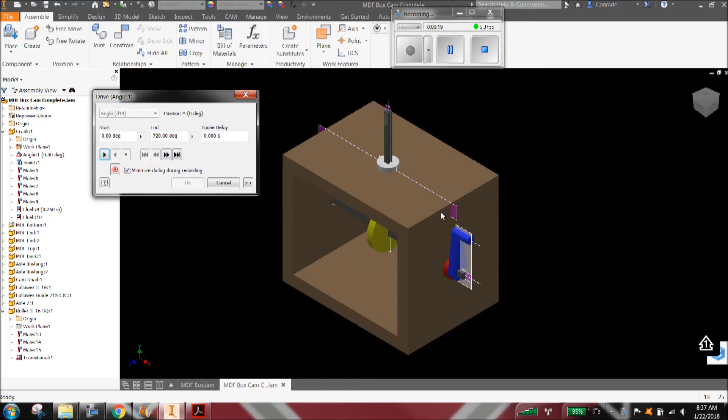Okay, what we're going for here is the Automata assembly, and we'll do just an assembly with one cam. Your actual Automata toy is going to have to be assembled differently, but this is what we're going for. And you'll notice that we've got lots of work planes helping with this assembly.

Just to review good practices and procedures: number one, make sure all of your Automata files are in one project folder. Don't use any subfolders, there's really no need to for this assembly. The first step you're going to do is assemble and ground the box. Those mid-planes really should be used.

Inventor likes math, but it likes geometry a lot better. And the transitional constraint that you use towards the end of this assembly wreaks a lot of havoc on just mating the axle to the cam itself.

So what we want to do is make sure you have a mid-plane and axis on your crank, your axle, your bushing, all your cams, the roller, follower, the guide, and the box top. I'll show you what that looks like here in a second. And then you can toggle off the visibility of those work planes and work axes as needed.

But the key is every part of the crankshaft needs to be constrained to the crank. Keep every constraint back to one part.

As we go through this, we'll see that if your cams are not built correctly geometrically, you will have issues, and this will not drive itself. Then you have the fun part of going back to fix it. But you must use axes and mid-planes to do this assembly, okay?

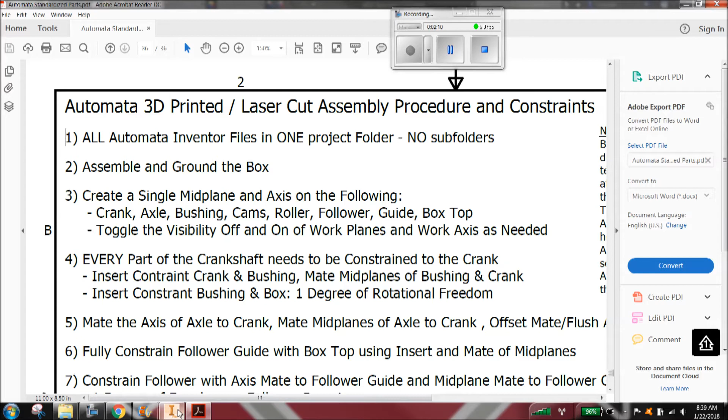So let's go back and look at what we're talking about here. You can see I've brought all my parts in for a simple assembly, and I have a mid-plane and an axis turned on for each one.

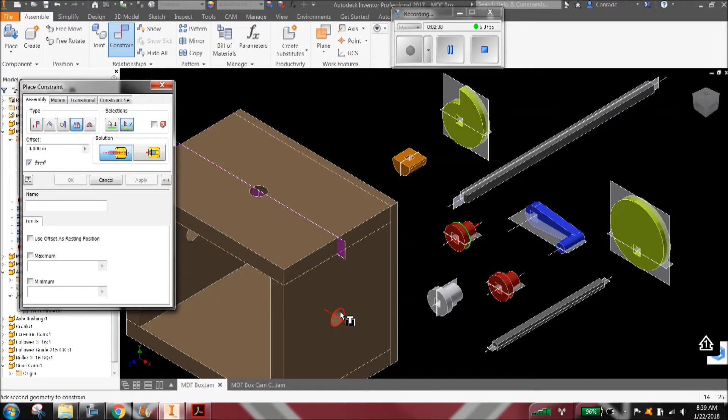Starting out this assembly, we'll just go ahead and pick the axle bushing and insert that. Remember to click apply so that everything sticks. And then I'm going to take the crank and insert that into the bushing.

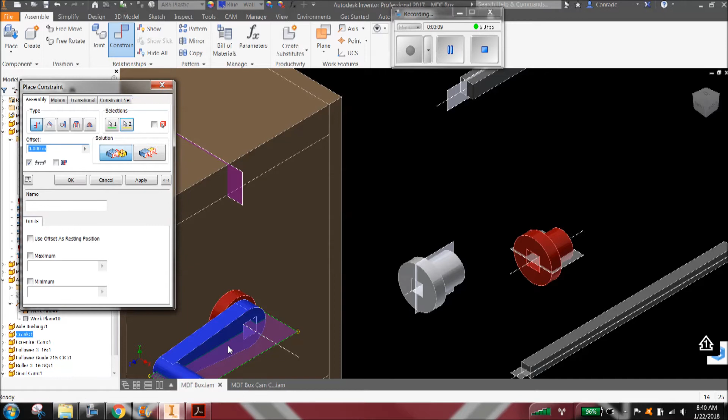Okay, so if I look at this right now, they line up with each other, but they don't spin together. So now what I'm going to do is mate the mid-plane with the mid-plane. Okay, so now when I rotate them, we can see that they are both spinning together.

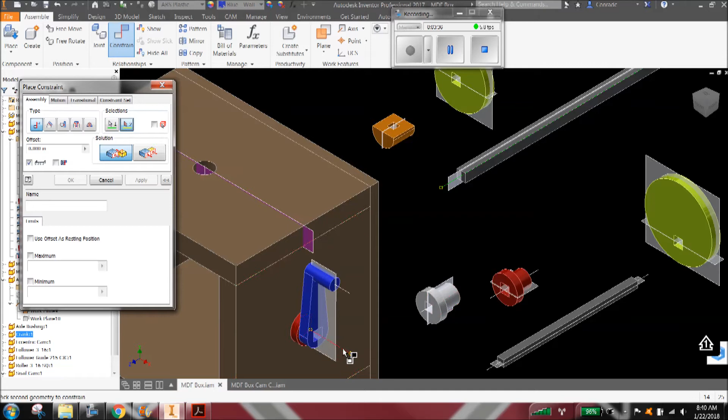Okay, next step is I'm going to put the axle in. So when I do the axle, I'm going to take the axis of the axle and mate that to the axis of the crank. Okay, so right now, what I've got there is that lines up.

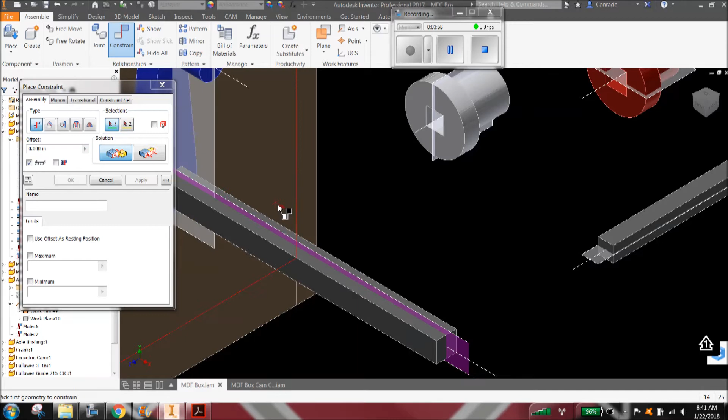Then we'll go ahead and again mate one mid-plane to the mid-plane of the crank. And finally, I could very simply just flush the crank outside of the crank face to the axle.

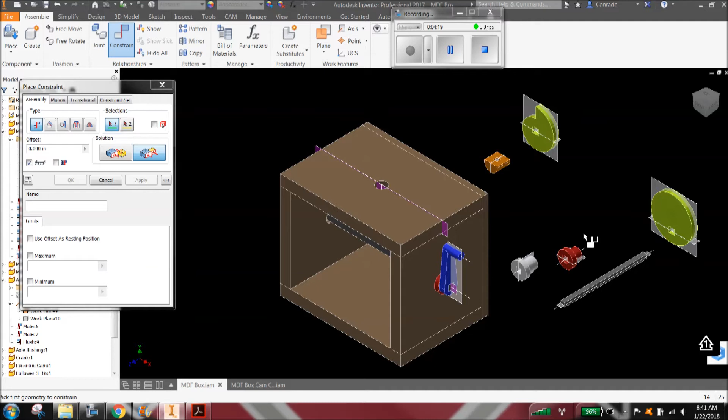Okay, next step, which would be very simple, I'll go ahead and put the bushing in on the other side in the same way. So an insert, and apply, and then go ahead and do a mate of work planes so that they line up and they spin together.

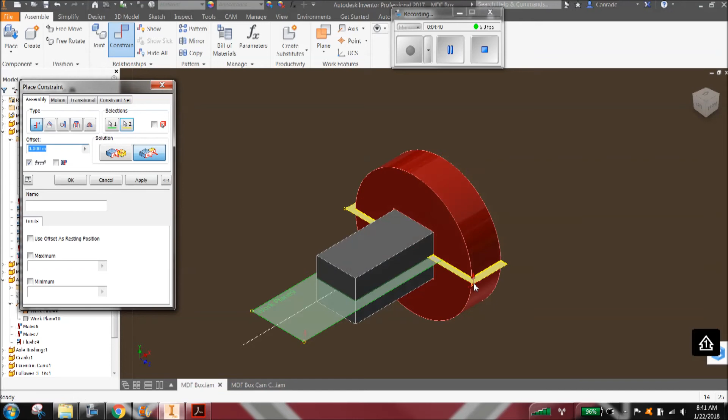Okay, so what we have right now is just rotational degree of freedom on the crank, and everything is moving together.

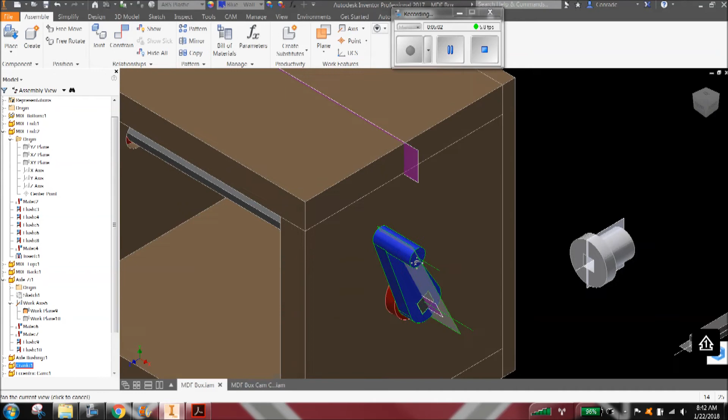Okay, next we'll go ahead and put one of the cams in. So for this, we'll go ahead and again mate the axis to the axis.

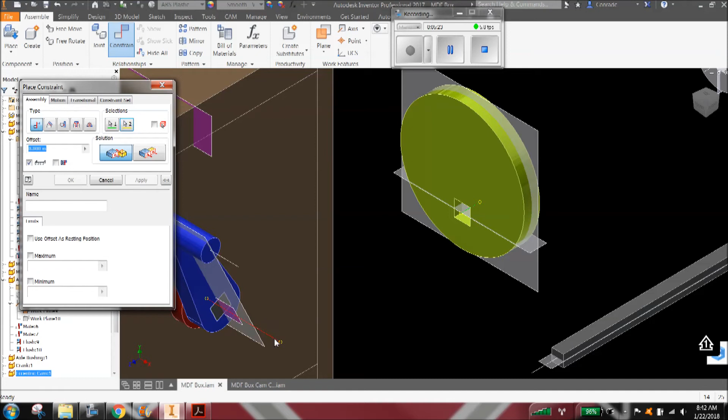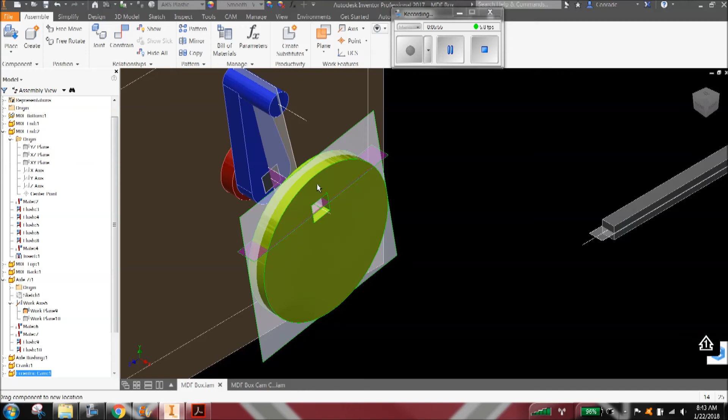Okay, so I know that looks like it's moving around like crazy, it's really not. And then what I want to do, since I have a horizontal and a vertical plane, the way I want these to line up, let's say I just rotated this cam around. Let's say I want these two to line up with each other in this fashion. Instead of mating the planes, if I had this vertical plane in I could do that, but I don't. So I'm going to do a 90-degree angle constraint of the midplane on the cam to the midplane on the crank.

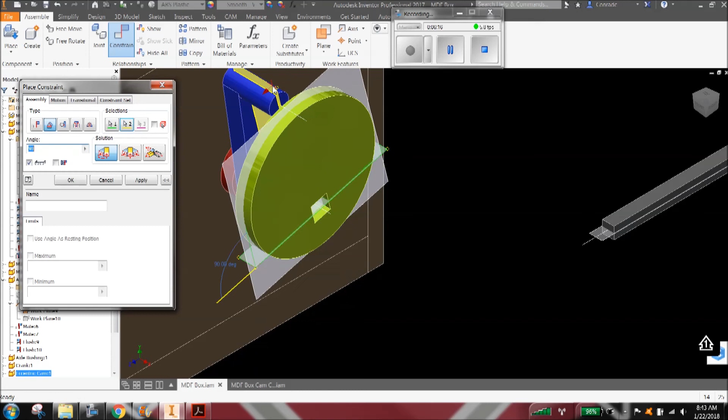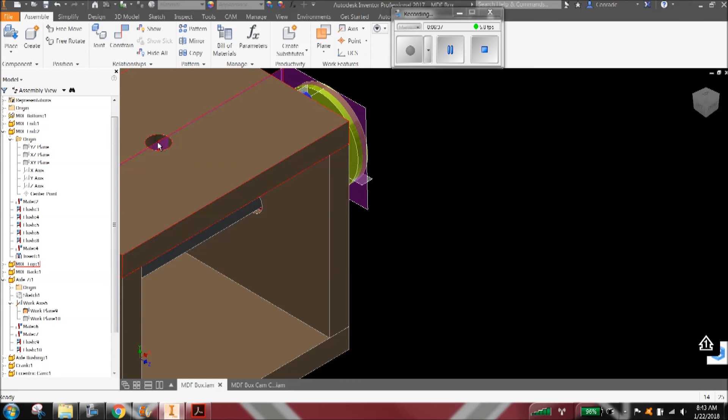So that gives me a 90-degree angle. Okay, and next I want this cam to line up right below the hole. So I will go ahead and mate that midplane to the axis.

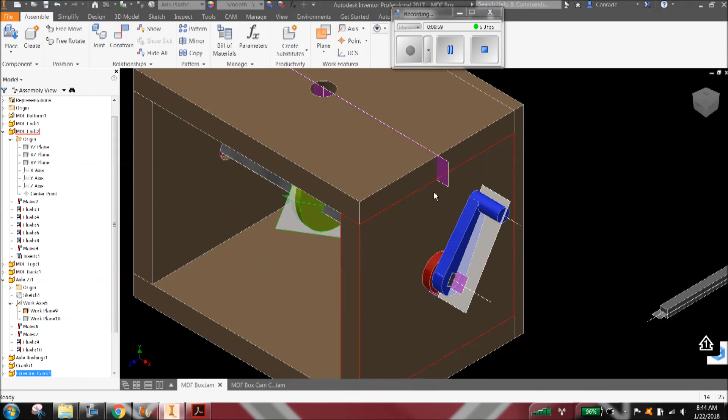Okay, so at this point, this gives us a crankshaft assembly where everything on the crankshaft is constrained to the crank. And if I had additional holes, additional cams, I would just have to do that with those also, same procedure. So we'll pause right here and then move on.